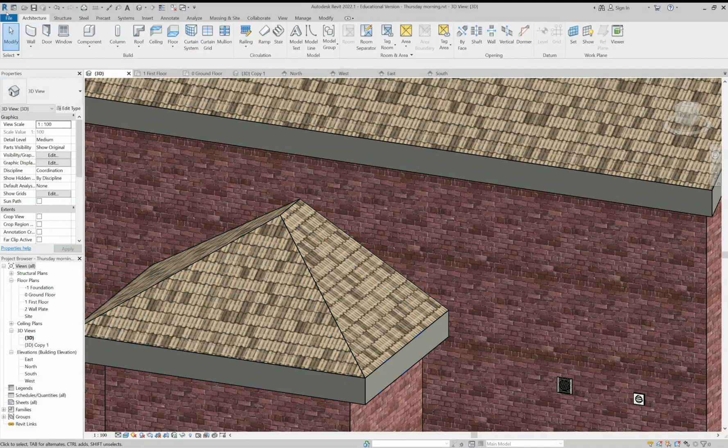In this video, we're going to have a look at creating some timber and some lead flashing to go against the wall and the roof junction. So let's start off by opening up a new family. And I'll just cancel that for a second. There we go. And this I'm going to do as a wall object. So model wall based. There we go.

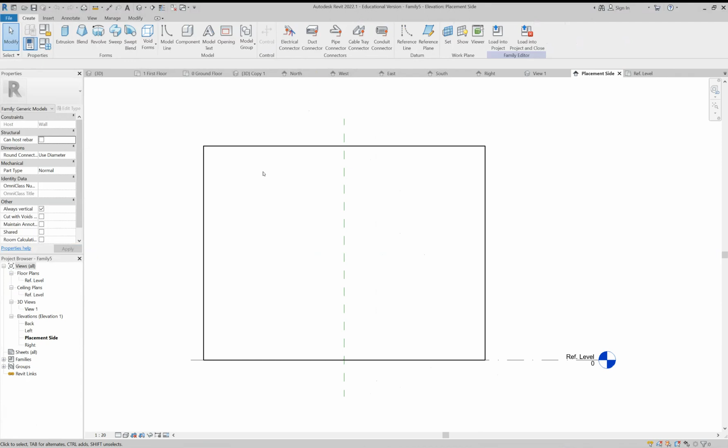Open. And now it will open up a number of little drawings for us by here, views. Okay. There we go. All right, so let's go on to this one first. Now, I'm going to do an extrusion and I'm going to do a line. The first thing I want to do is to get a line that is at the 30-degree angle, which is the angle of the roof that I have currently. There we go, 30 degrees. I don't want it that big though, so we'll say about there.

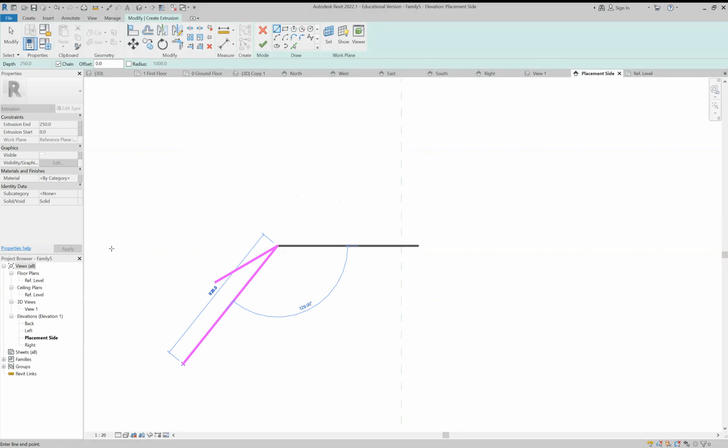Right, now I'm going to change the scale of the view as well to 1:5 because it will help make the lines a bit thinner and a bit easier to see. I'm going to go up 150, across 225, and then down to here, and then just use the trim command to join those together like so.

Right. Now let's set the extrusion. If you know the thickness of your wall and then half it, that would be a good place to start the extrusion. So I'm going to say 180, and I'm going to make that 185. So making the lead just 5 mil thick, which is a bit thicker, but it just helps it to show up. The material, okay, click on that.

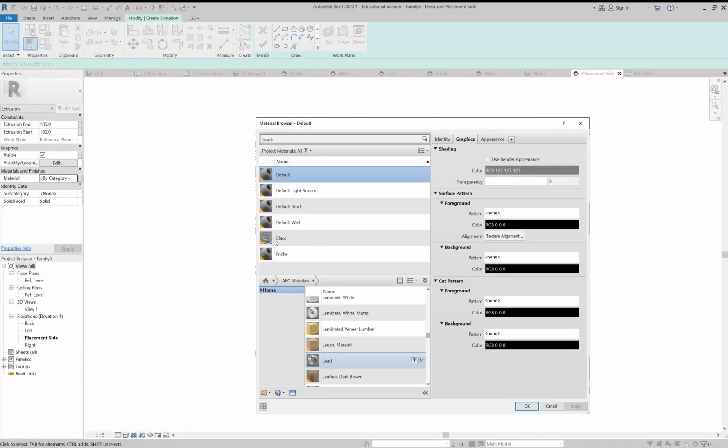Now, lead is not in the initial list by here, so I click on the home, go here, and then scroll down until I find lead. There it is. Click the little arrow to load it into here. And we can see the graphics and the appearance is on there. And I'll just leave it as it is and click OK. And that's our first bit. So I'm just going to tick that. Now it disappears by here. So if we now go to the back view, we can see it is around the back by there.

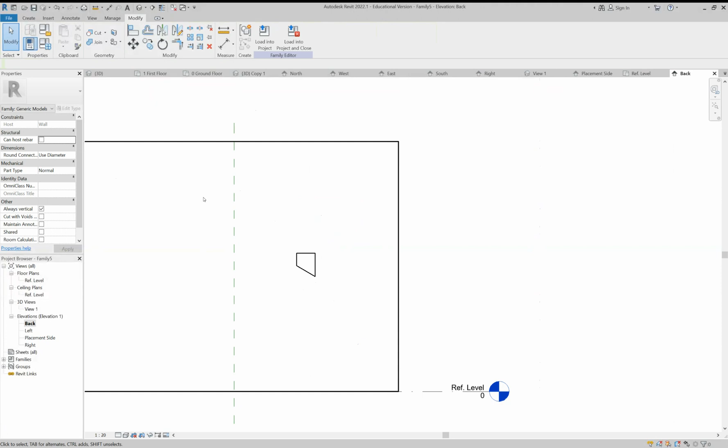So what I want to do now is to copy that. So click, copy from there to there, and we can just keep on copying that down like so. Okay, I'll just escape by there for now. And now at this point, we are really ready to do a file and save as. Ooh. Before we do that, actually, I do want to just add now the bottom. So I'll do a new extrusion. So the bit of lead work that sits on the roof.

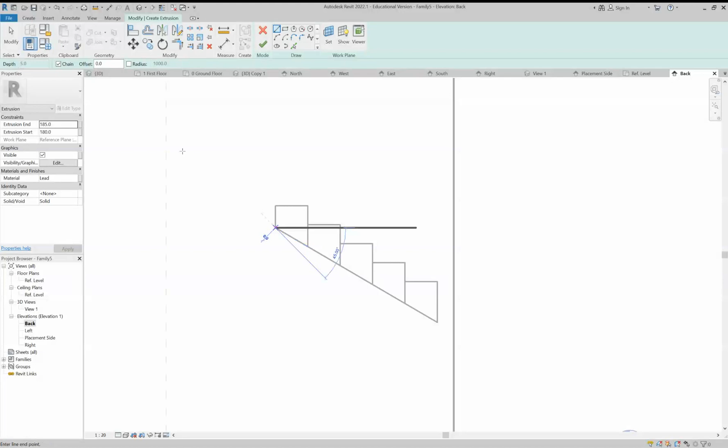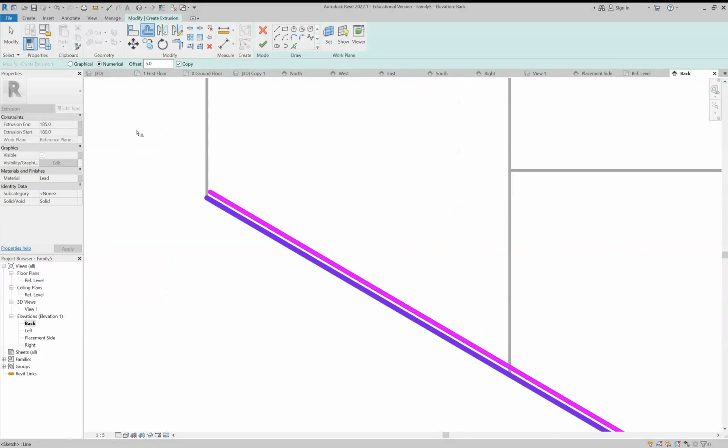So I'm going to go here. Now, remembering our other extrusions are 180 to 185. So I'll just do that, use the offset, do an offset of 5. There we go, offset 5 already set there. I need to change this again to 1:5 so I can now see these different lines. Click on both ends. Making sure I get it end to end.

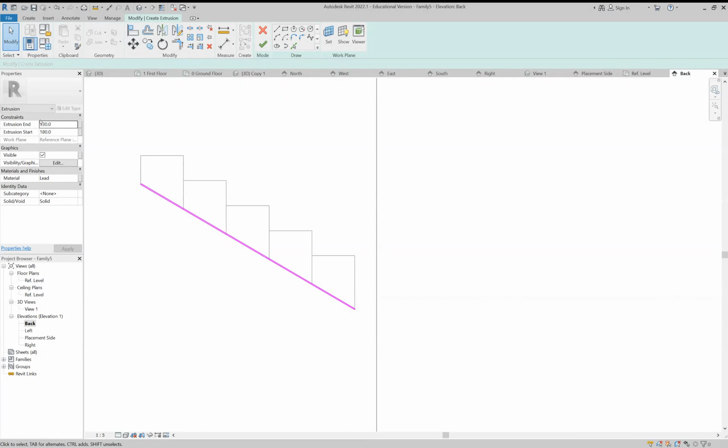There we go. Now, the extrusion for this one, I'll leave the start as 180. I want it to come across about 150, so I'm going to say 330, like that. And again, material lead, job done, tick. Right, so we'll have a quick look at that by there, and we can see we now have some lead flashing. Okay.

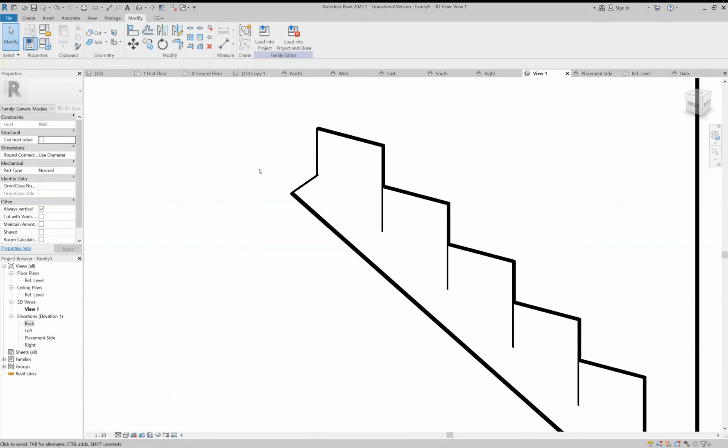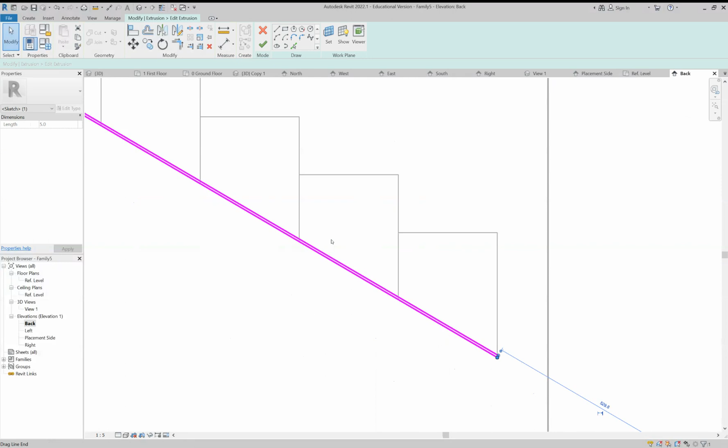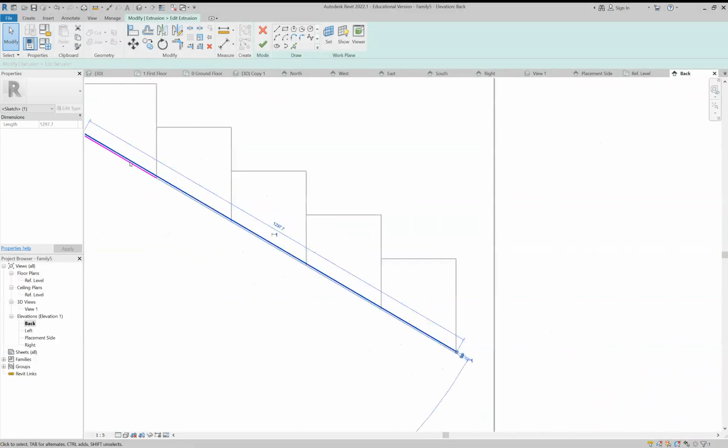Let's look at this and just think, well, it hasn't got the lines going across by there, which would possibly be a nice thing to have. So I could go back over here, click on this extrusion and edit it. And instead of it being all the way down there, I could drag that. Let's delete it actually. There we go. And make this one go to there. So now it's more like an individual component and we'll get the line visibility.

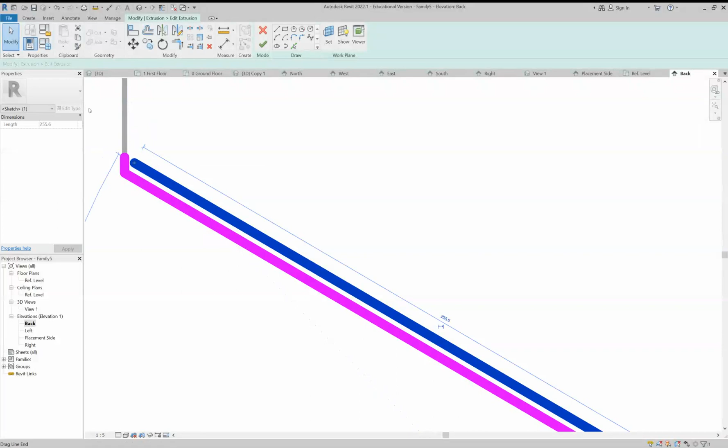There we go. And then I'll just do the same as I did. I'll just edit that side of it as well. There we go. Okay. Right, now I can copy that from that top end to that end there and just repeat that going down like so.

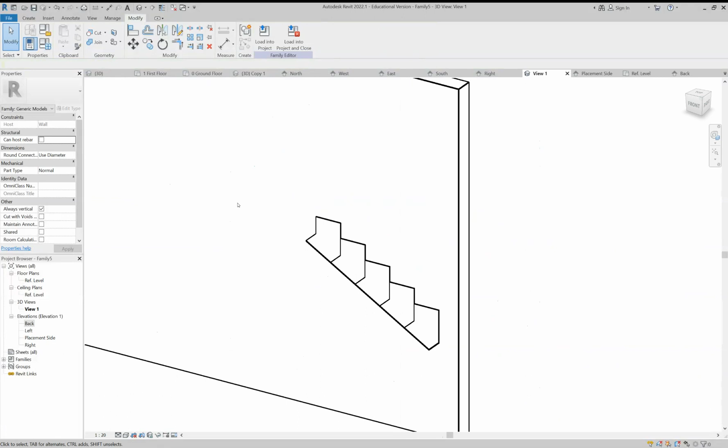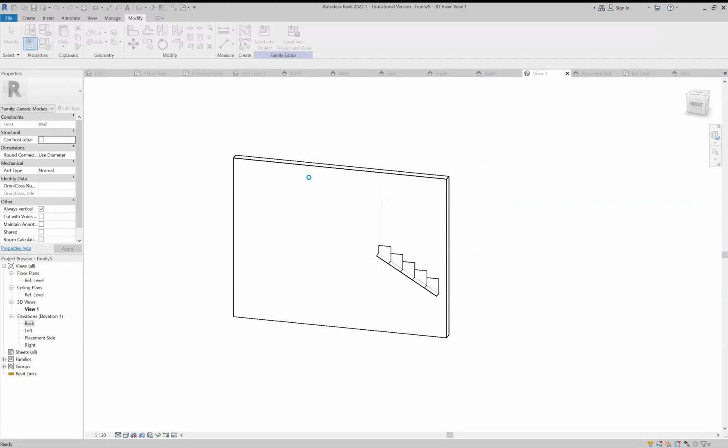Okay, so now when we look at it, there we go, we can now see a line coming across as well, which does look better. So let's now file, save as family, and I'll call this lead flashing. Okay, and save. So you've got that somewhere nice and safe. And then I'm going to load it into my project.

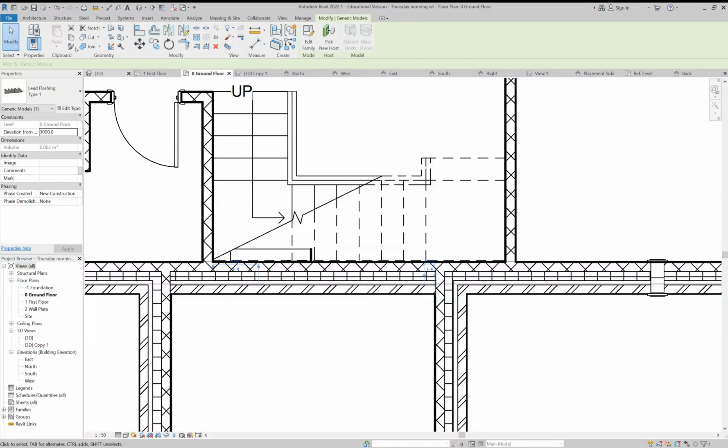And we can see the elevation here. I'm going to stick it... see now, if I put the cursor on that side, we can see the lead work over there. So I'll just click there for now. Click on that lead work. Elevation. Well, we're going to want it up higher than that, so I'll just go 3000. Now let's have a little look at it in 3D. As we can see, it's not quite high enough.

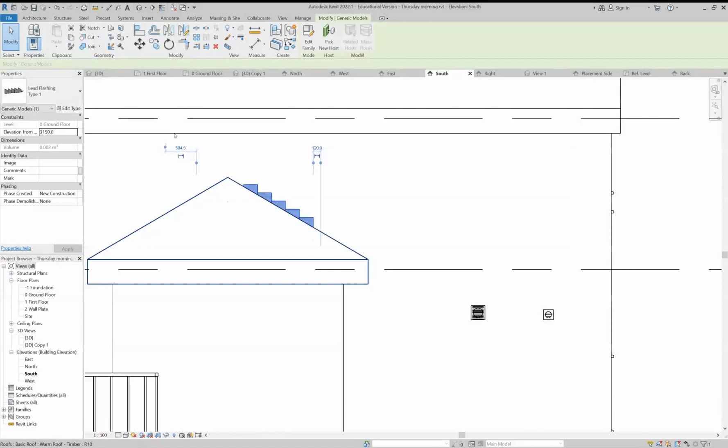So what would be a good thing here probably is to actually look at it straight on from an elevation. So let's make it 3150. And now we can see it starting to get somewhere. So what I'm going to do here is actually just use the move command. Now what I would have liked is for it to actually get the bottom of it visible. So let's just drag it up there and then use the move and go from that bottom corner to the top of the roof by there.

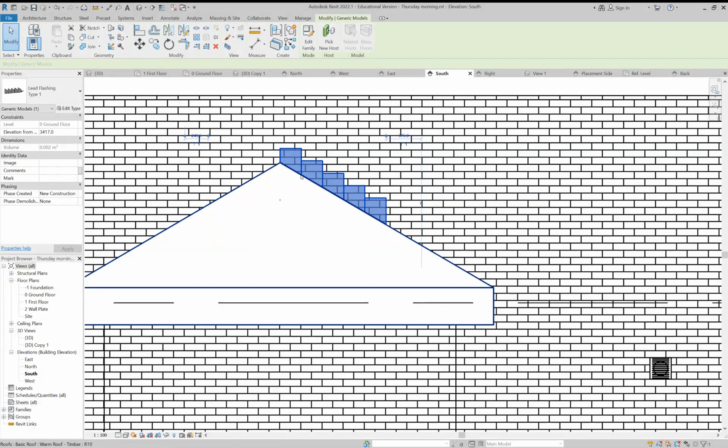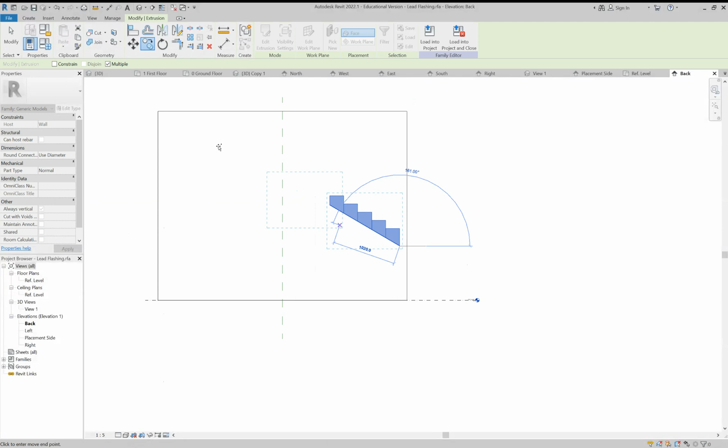Now we may notice it doesn't cover all of it. You could just insert another one and go from there, or you could actually edit the family and add the number of them that you need. So we can see here we've got 2, 4, 5, so another 1, 2, 3, 4, 5, possibly another 6. So we could edit the family again. Go back here. And what we want to do is basically copy all of those to there, and we'll have one more on top, and we'll see what that looks like.

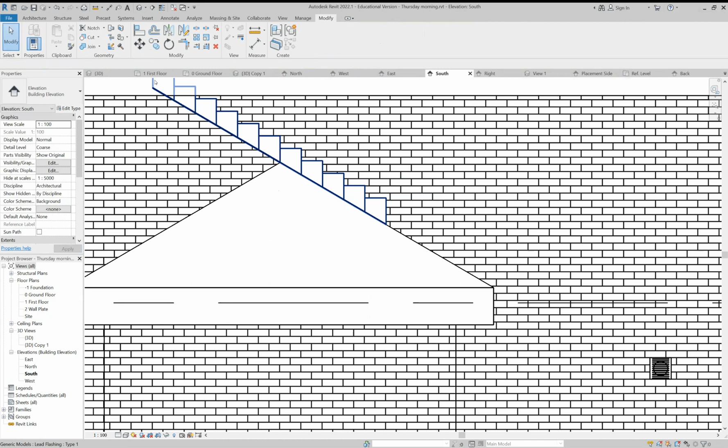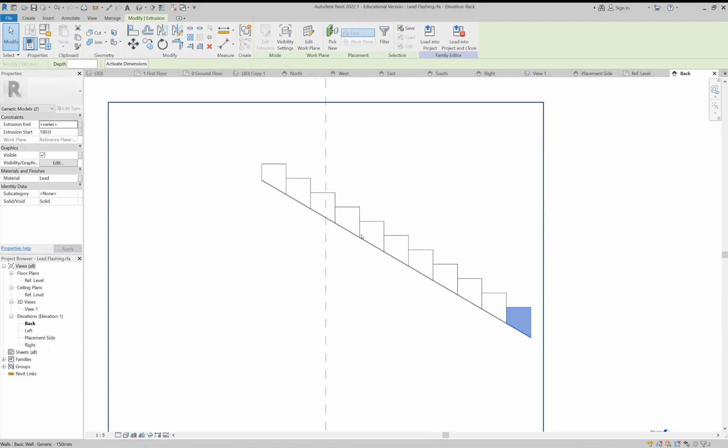And of course you could, if you need to, just crop one of them in half or something like that, and we'll just load into the project, overwrite the existing version. Now it's gone up the top at the moment, but we'll just click that and then move it from there back down here like that. And we can see I did do one too many, so we do need to just knock the bottom one off. There we go, and load and overwrite. And it has come down a little bit here, so we'll just adjust that height now, but at least we've got it the right length. Okay.

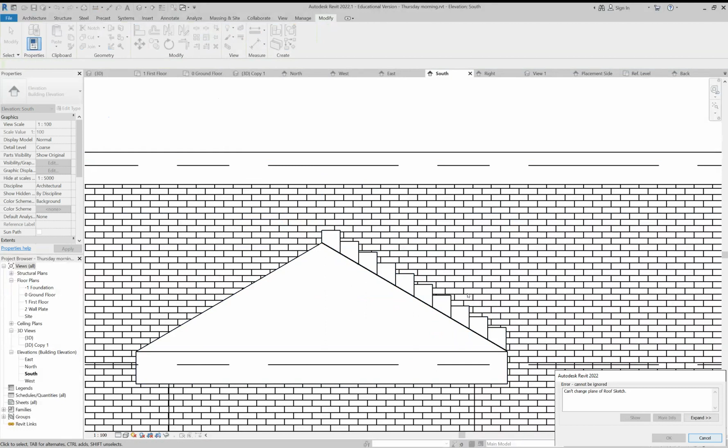And then if we want it on the other side, of course, we could just do a mirror command, and that's fairly... oops, cancel that, went a bit off angle, mirror. There we go. So got some lead flashing on there. Little play around with it.

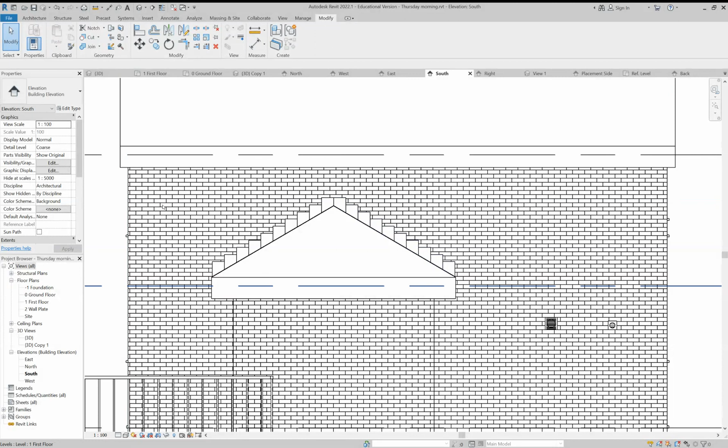Just be wary that if you do have multiple roofs where you want lead flashing and different lengths of lead flashing, do save as between each one so that you can insert multiple types of these rather than just having the one, and otherwise it'll edit it for all of them. So let's look at that in 3D just to finish off. There we go. There's our flashing.